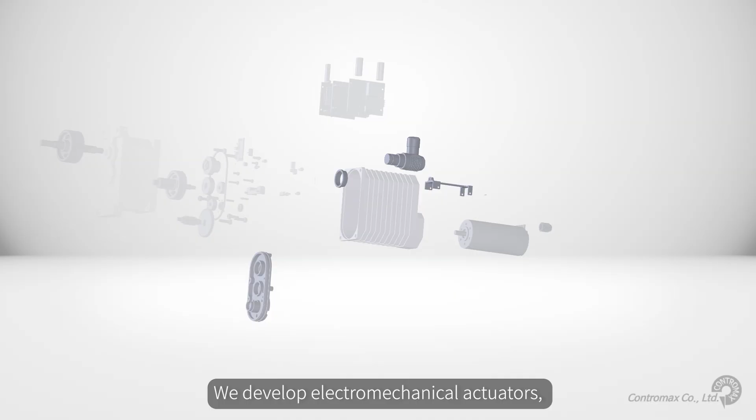Hi, we are Contromax. We develop electromechanical actuators, servos, for aircraft, meaning it's not just an actuator you can easily see around, but this is a safety and flight critical component for your flying applications.

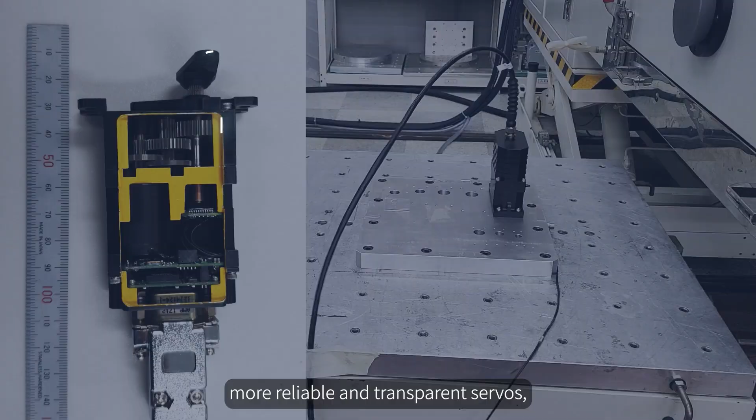We are located in South Korea. The company was founded in 2014 with a strong motivation: let's provide more reliable and transparent servos. That's why we released this video.

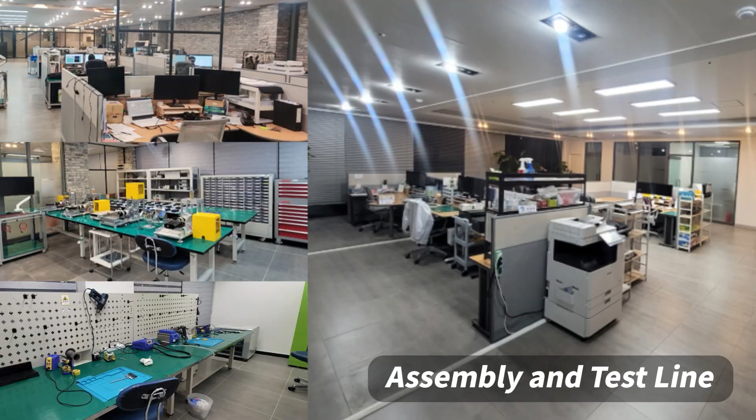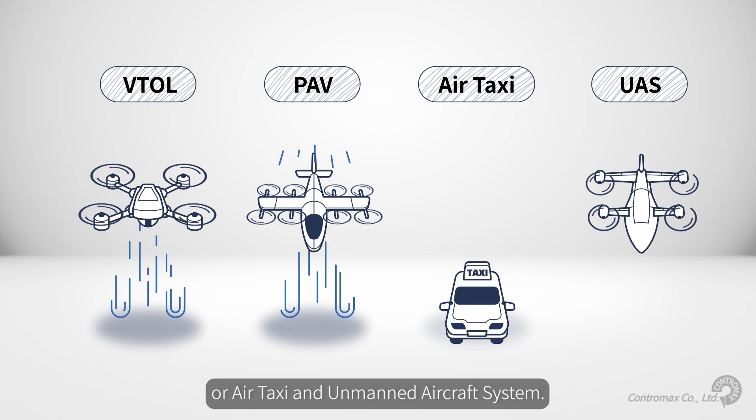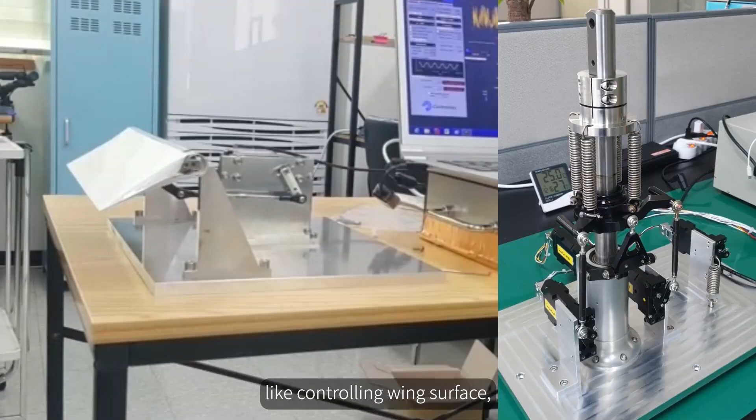These days, there are many flying mobility applications under development in the world, like vertical takeoff and landing, personal air vehicle or air taxi, and unmanned aircraft system. These applications are our primary interest because they all need a type of servo, like controlling wing surface, swash plate, steering, brake, and a certain structure position. They are where our ServoMax series can help.

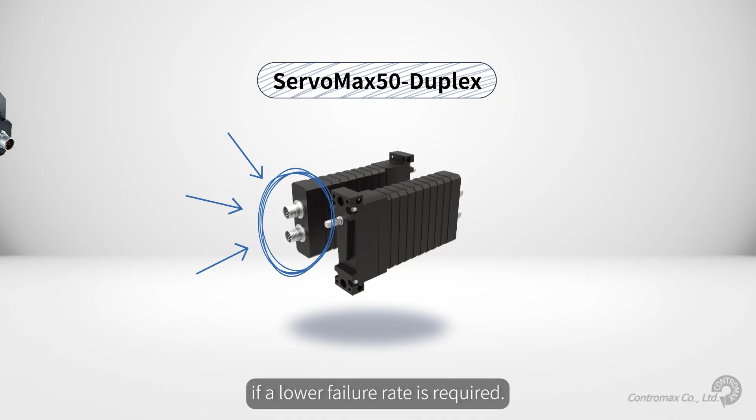Currently, we have several models, from low torque to high torque model, like ServoMax 20, 25, 50, 100, 150, 300, and 500, for 500 kg force centimeter. Also, ServoMax 50 with duplex motors if a lower failure rate is required. In addition, we can provide a service developing a customized gearbox if it can save your time and effort.

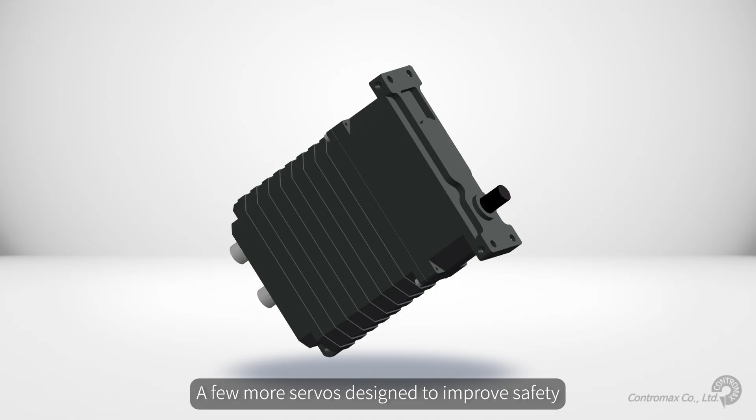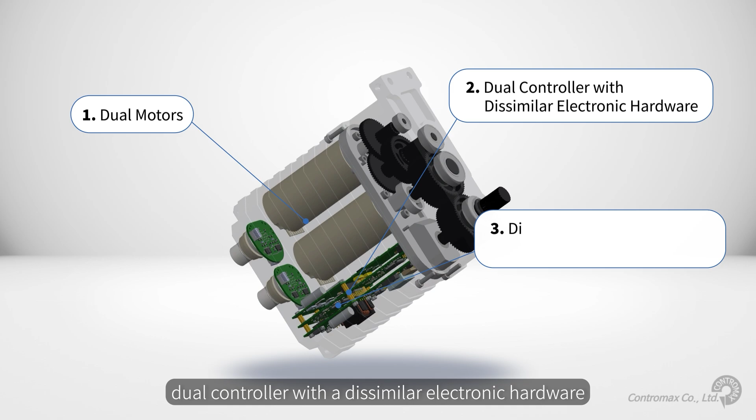A few more servos designed to improve safety according to aviation practice will be released in the near future, like having dual motors, dual controller with dissimilar electronic hardware and software, different development tools and engineers, separated and segregated connectors, and minimized single point of failure.

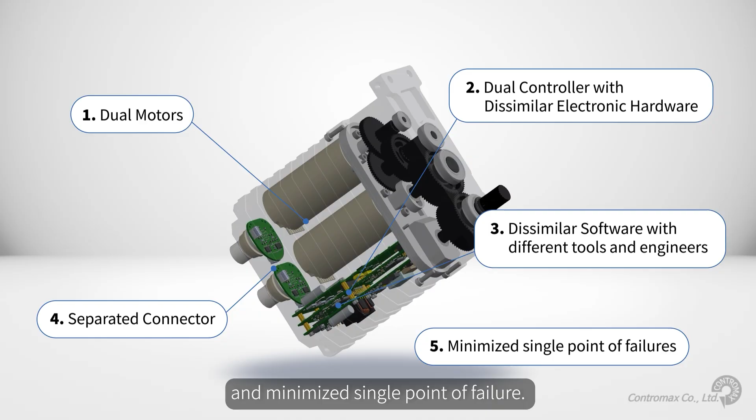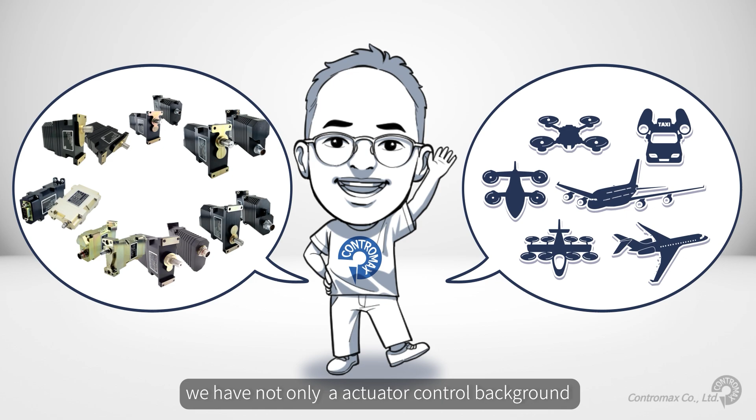If we wanted to become just an ordinary servo company, like many in the world, we wouldn't have started this business. Daniel, the company's CEO, with more than 24 years experience in aircraft actuator development, and other motion control experts in the company—we have not only actuator control background, but also aviation background too.

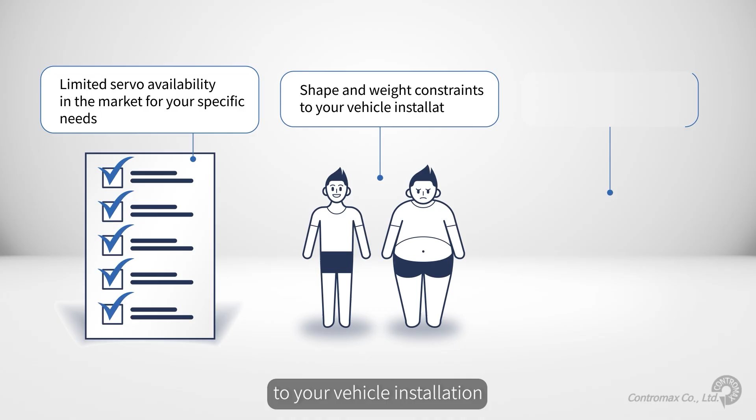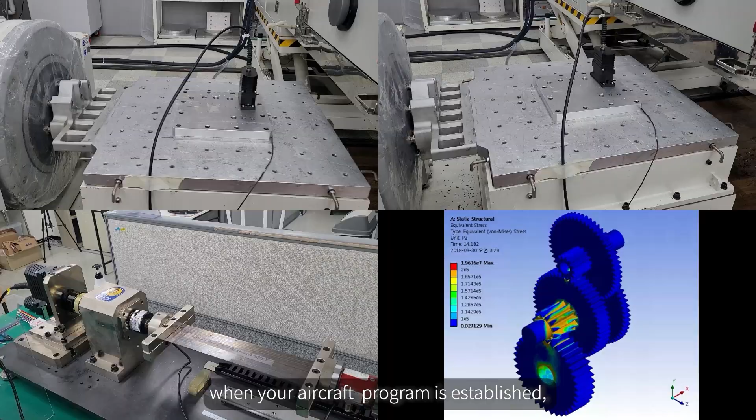So we understand the challenges you might have faced, very likely, such as limited servo availability in the market for your specific needs, shape and weight constraints to your vehicle installation, or customized electronic interface. Why would we just sit and watch such challenges happening again and again every time your aircraft program is established? We wanted to help.

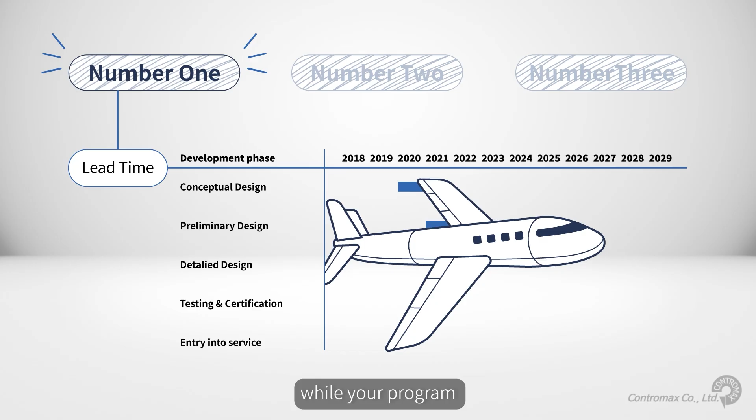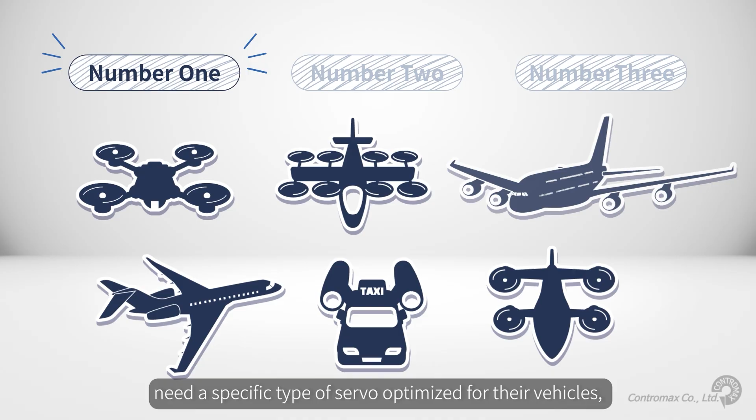How? Let's have a look. Number 1, lead time. Have you ever experienced trouble finding a servo in time while your program is always behind schedule because of servos? Or because of the fact that all aircraft are different, meaning ideally all aircraft need a specific type of servo optimized for their vehicle, which takes time and makes servo delivery a bottleneck.

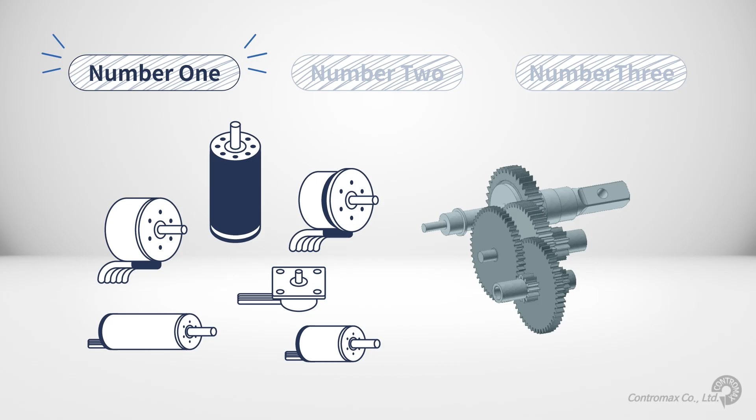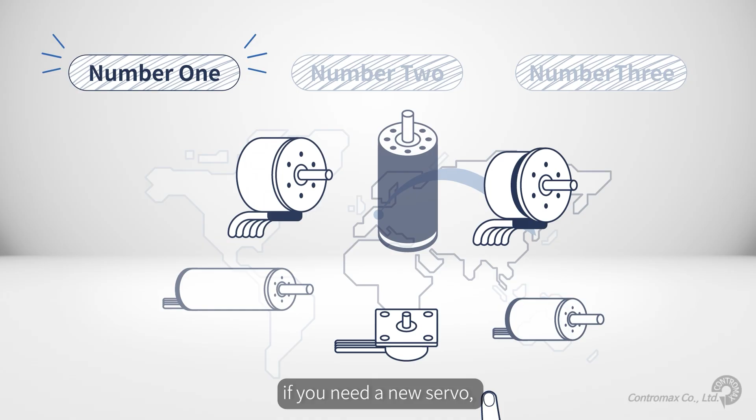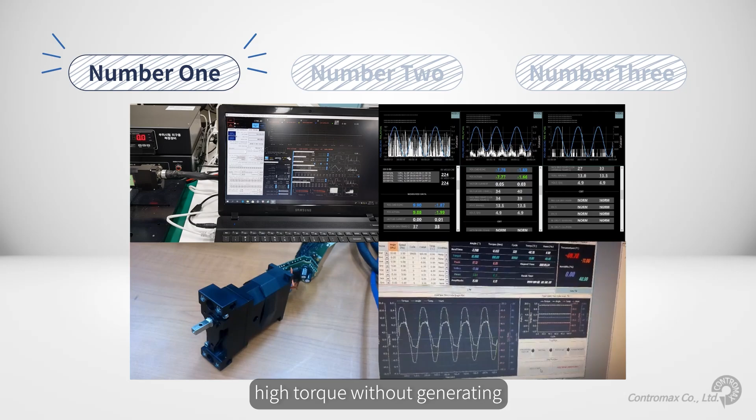Long lead time is generally caused by motor and gear train. About the motor, we've been working with very stable European motor supply partners since the start of this business, so we can pick and choose one if you need a new servo. The range is wide enough to accommodate a new servo requirement. Plus, we understand how to control those motors for your application, which requires low current consumption, high torque without generating too much electromagnetic noise, acoustic noise, and aiming to increase the lifetime of the servos.

About gear train, we have our own hobbing machine to manufacture gear trains. Gear train is a collection of mechanical parts under high amount of friction, pressure, stress, and eventually fatigue, which may break the parts. Not many servo companies have such an expensive and high precision machine, which requires outstanding skills and experience beyond just machine operation, but we do, and gear inspection facilities too.

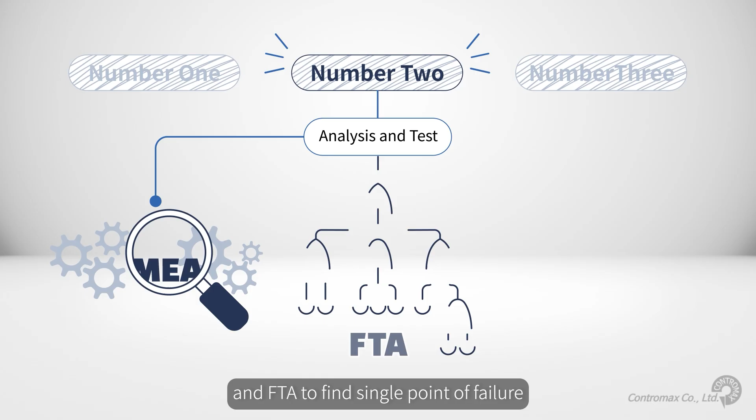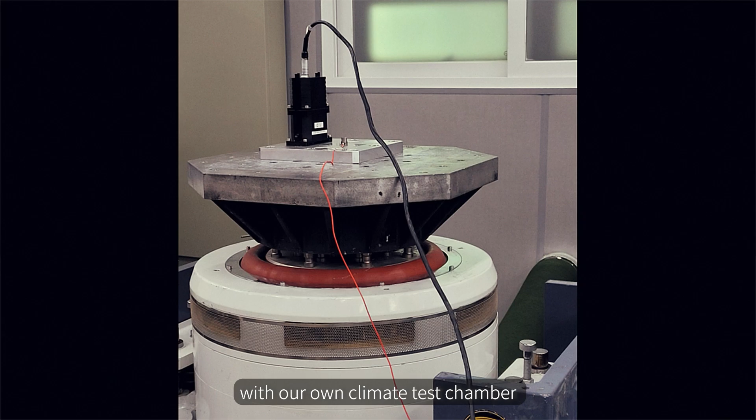Number 2, analysis and test. We don't just manufacture, we think first based on aviation best practices like FMEA and FTA, to find single point of failure and any common mode error or failure. And also verification with environmental test with our own climate test chamber, and by using external test facilities for electromagnetic compliance.

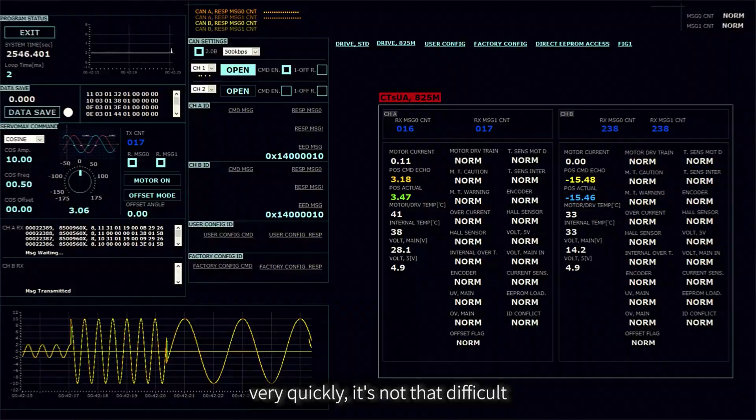Besides, we make custom test benches and in-house test software very quickly. It's not that difficult because that's what we do.

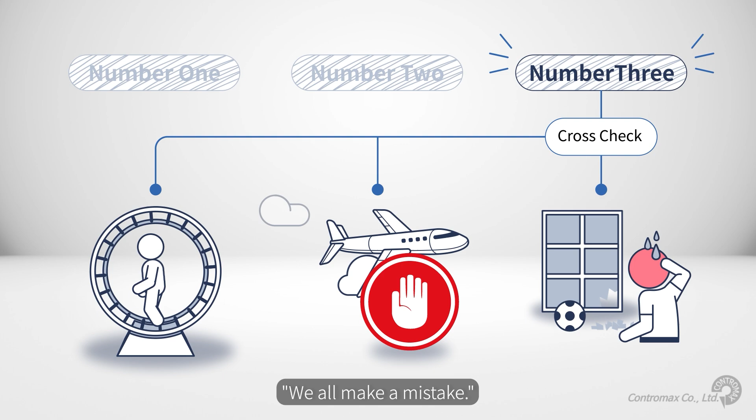Number 3, cross-check. We understand how dangerous it can be if you think alone, make alone, and test something alone. That's strongly against the aviation culture, which is built on the fact that we all make mistakes. Therefore, we talk together, share what we learned, no matter if it was failure or success.

For instance, we are using different microcontrollers, MCU A and B, if it's for safety-critical applications, to minimize errors, meaning there are different engineers in the company doing different design, different implementation, making different test cases. In addition, we are still learning.

There is one story which might have sounded very critical for you. It's about servo jitter, or somebody may call it self-oscillation. When the servo is connected to aircraft structure like a control surface or vane, depending on their dynamics, it vibrates itself. Looks severe, isn't it? So we have developed a few solutions together.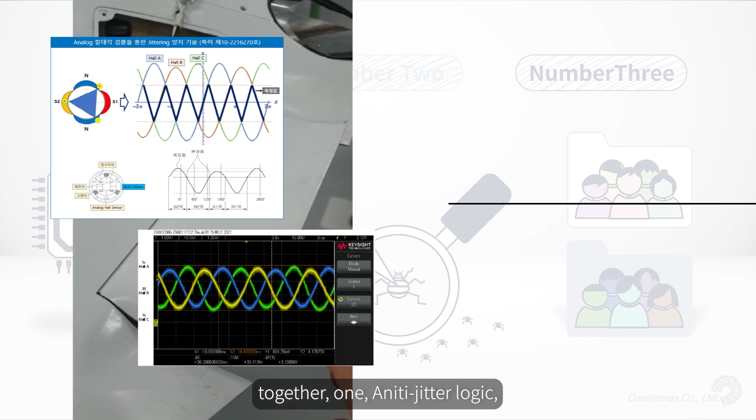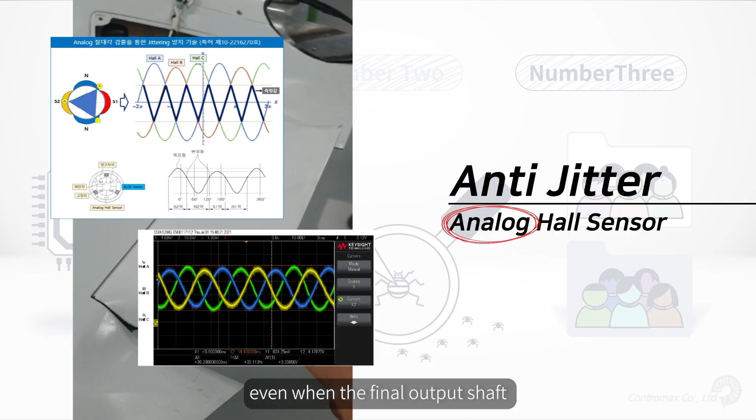1. Anti-jitter logic. Jitter is normally induced by high gear ratio while you're using digital sensor to control a motor. We use analog sensor instead of digital sensor, meaning the motor control is precise enough to prevent jitter even when the final output shaft position is deviated by an extremely small degree.

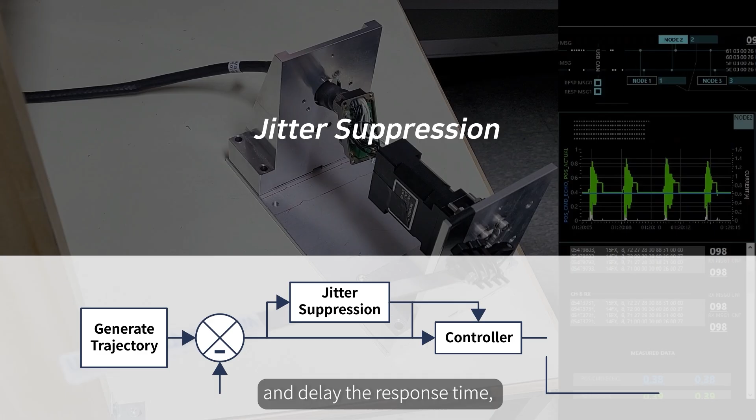Another solution is the servo detects the jitter as quickly as possible and stops it. It may reduce some control accuracy and delay the response time, but it will keep the servo intact, meaning it will increase your aircraft survivability before the servo goes to the state of total loss.

So basically we collect ideas to find out better solutions out of the box by inviting all different perspectives, such that we understand this is not optional but essential to be aligned with aviation culture to secure the safety. We are taking care of your loved ones returning home from the sky.

To quantify the safety and reliability, we are following FAA and EASA's best practices and guidance, because we understand aircraft manufacturers' concerns. Again, we want to help your business.

Let's recap quickly. You need a servo for torque, travel range, angular speed, and a certain level of lifetime. We understand these are crucial for your application, but we think they are just the bare minimum.

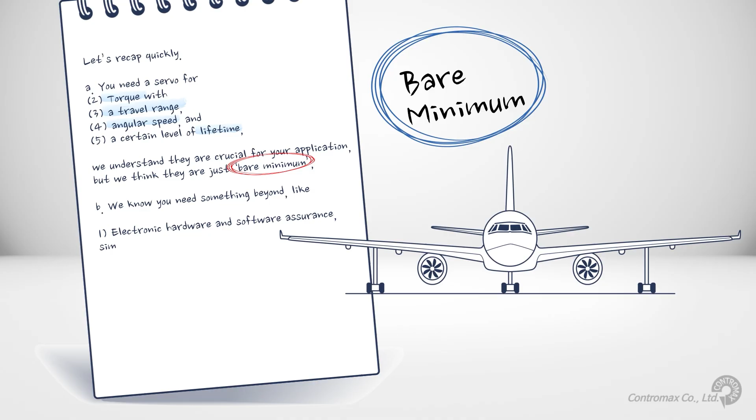We know you need something beyond, like electronic hardware and software assurance, simply compliance against RTCA DO-178 and DO-254. You will want to identify what kind of failure modes the servos may have and what detrimental effects they may make to your application, so-called aircraft failure conditions. These are explained in SAE ARP 4761 and 4754.

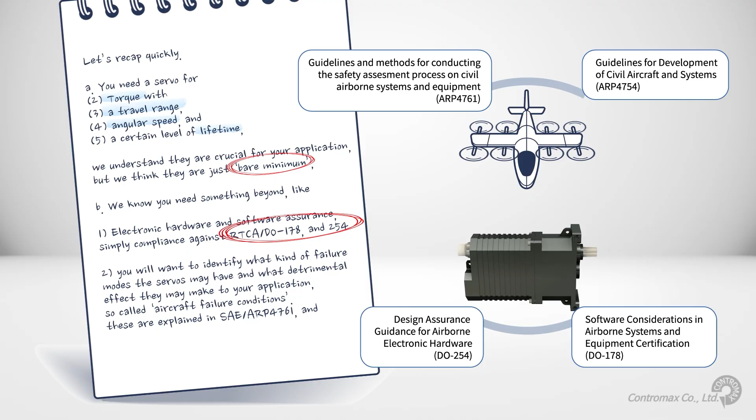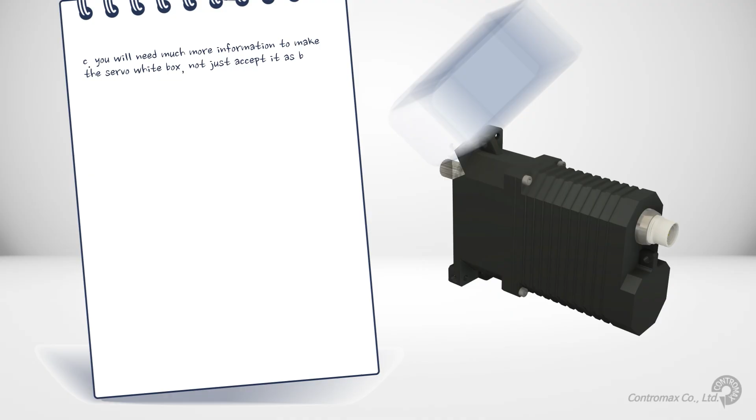You will need much more information to make the servo a white box, not just accept it as a black box. We can share common mode error failure, failure propagation mechanism, failure rate calculation by using a dedicated standard like MIL Handbook 217. There are much more ideas and internal projects ongoing.

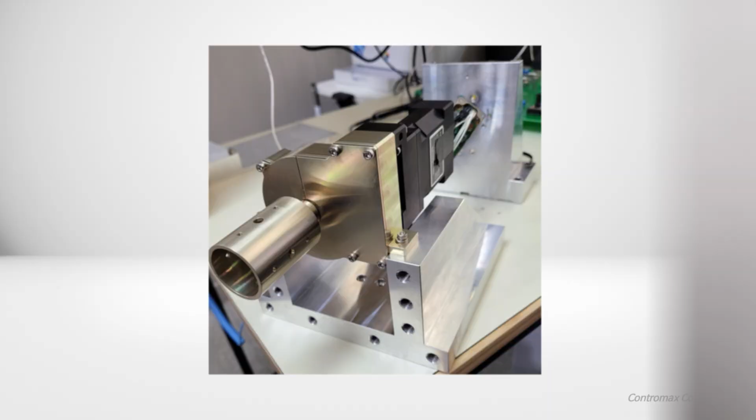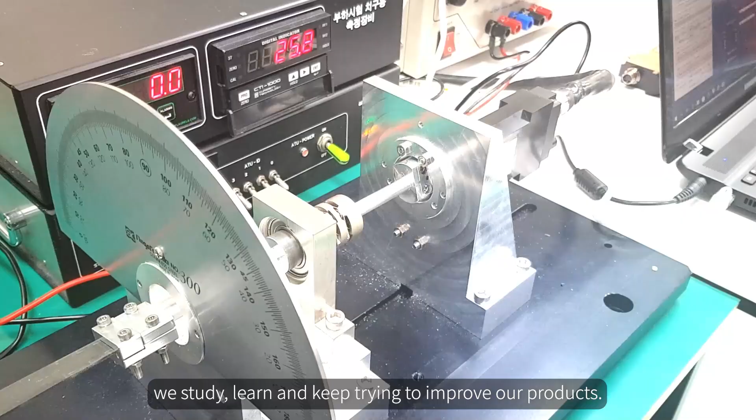These may not be perfect solutions and may not always end up being successful, but the message we'd like to deliver to the world is that we study, learn, and keep trying to improve our products. Why and how? We love servos like you love your application.